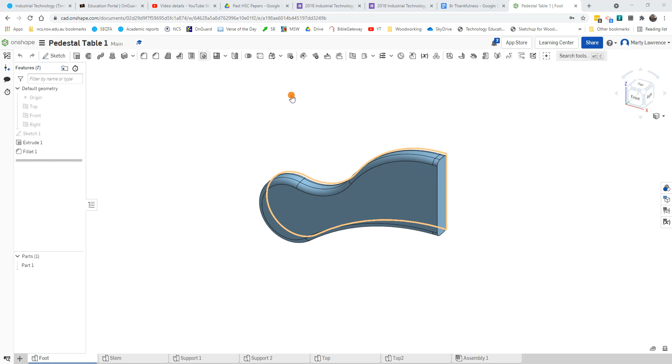This should be one of the final videos for the pedestal table. We've drawn all the parts that we need: a foot, a stem, two different support pieces, and we've designed the tabletop, whichever design you choose. The last thing we need to do is actually assemble it.

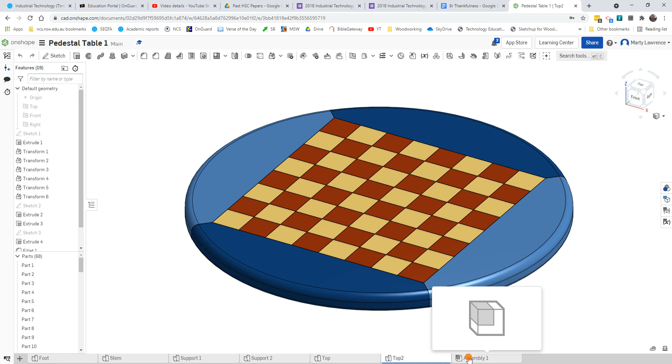So the other tabs down the bottom, you're going to go to the assembly tab. It's possible that you may have deleted that by mistake, so if it's not there, you just go insert new element and create assembly, and that'll be there. It'll bring you to this page, which is slightly different to the last one. There's different tools, it's kind of set up slightly different.

Up in this area where the sketch button normally is, there's an insert button. So I'll get you to click that, and you should see all the parts of your project here.

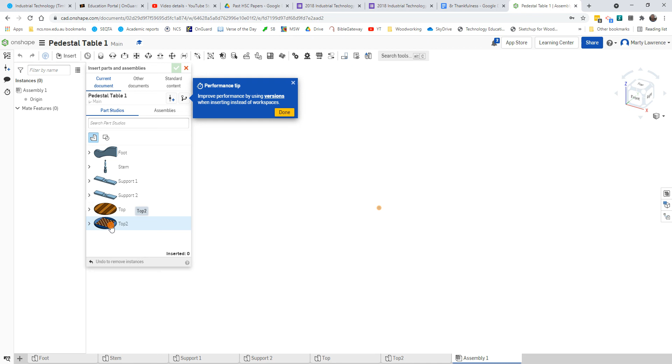Start with the top, and we'll just place that there. So you click in the dialog here, and then you move over to the white area and place it somewhere by clicking. Just to repeat, you've got to click once in this table that comes up, then move over to your white workspace area and click again to place. For now, that's all we are inserting.

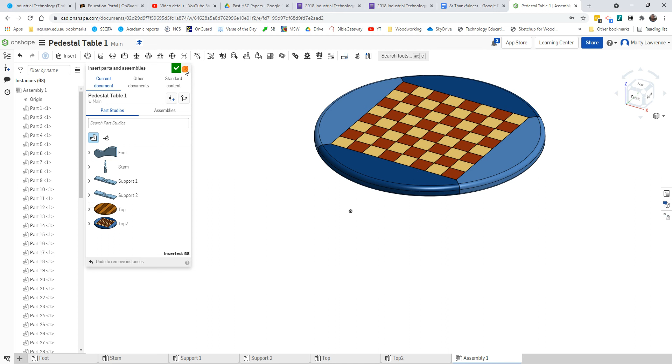Don't go and insert all the other stuff yet. Oh, I think I should have ticked - so don't do what I just did. So click insert, we'll only choose the top. Click in the list and then click once in the workspace.

We're just going to zoom that out. This time, tick, and all the parts we just inserted are there. So this thing has got heaps of parts.

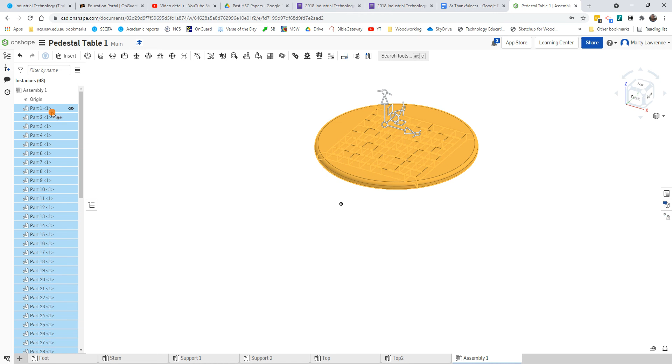Before we do anything, we actually will just want to select all those parts. The easiest way will be to drag a box around everything. I mean, you could go through the list and click each one to select. Now that they're all selected, right click, and we want to do this thing called fix.

And it'll put that icon next to all these pieces. So that's important that all the parts have that icon, because as we start inserting other parts, we don't want these parts to move around. We can turn that origin off too, which is that dot in the middle there, just with the eyeball.

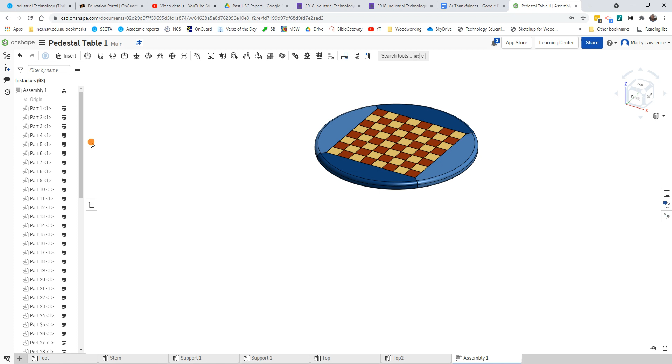All right, we're going to go back to the insert menu and start inserting all the other parts. So only the tabletop, we're going to fix all those parts in place. Now we can insert all the other parts, and you do that by clicking once, then click to the white space. So there's 4 feet.

So we click once on each one, go to the white space and place it. Click once in the menu, click to place it. Try not to pile them all on top of each other - it'll just make it hard for yourself later. So put them in an area where it will be easy to get to.

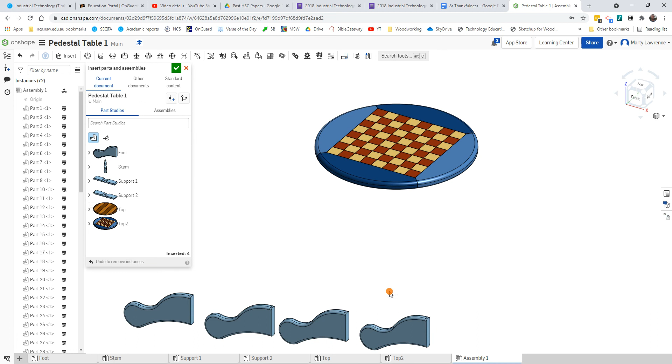There's one stem, so we'll just click once and place it on the workspace. There's one support 1, and there is a support 2. And tick once you've finished inserting.

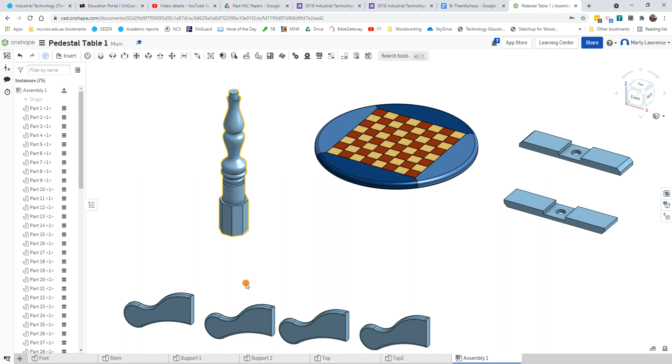Make sure you've got all your parts there. You've got the top, which we fixed all the parts, we've got the stem, we've got 4 feet, and the 2 different supports. Remember, the only difference between these supports is which side the chamfer's on. Other than that, they look identical.

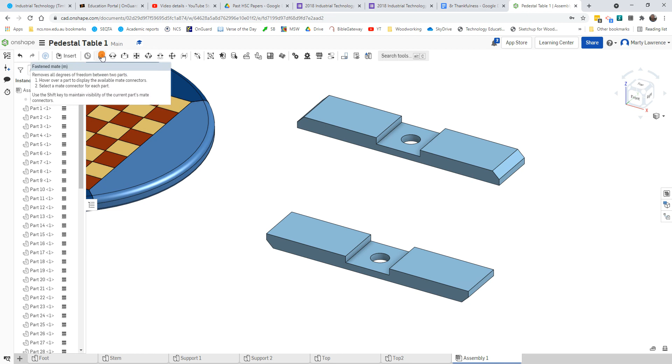So I'm just going to zoom in on these 2 supports - that's where we're going to start our work. We're looking in this top menu for a thing called a fastened mate. If you click that, we need to fasten this surface to that surface with the holes centered, so we can actually use the holes.

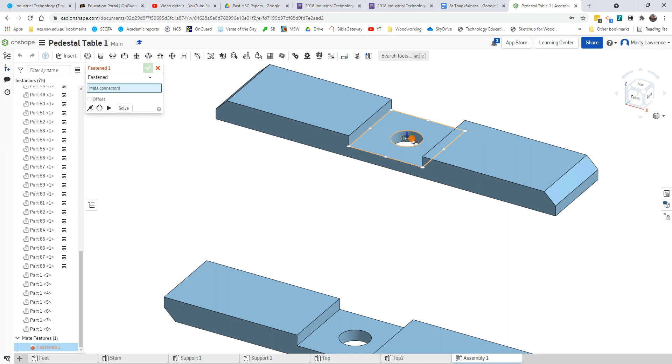Notice how I get that icon as I zoom in here, and it snaps to different places. It snaps to corners, but it also can snap to the midpoint of that circle. So if you need to, zoom in, but we need that little icon to be snapped to the midpoint in the circle. Once it's there, click once, and it should highlight that face yellow. Then let's move over to this face and do an identical thing. We're going to make sure that icon is on this face, but centered on that circle.

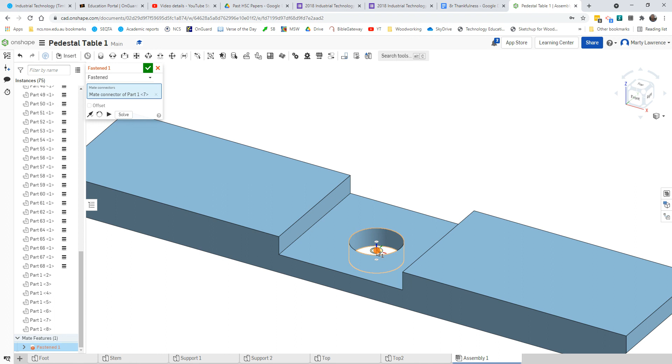Now, it could be easier to accidentally put it down - I don't know whether you've noticed that that can happen, it can go lower. Aim not to do that. Click, and it should - it has, but it's a bit hard to see. It's actually put both the parts together, and you can see that by looking at the end here. So it's done the right thing, but it's just put it in the wrong orientation. So there's two buttons here that turn up.

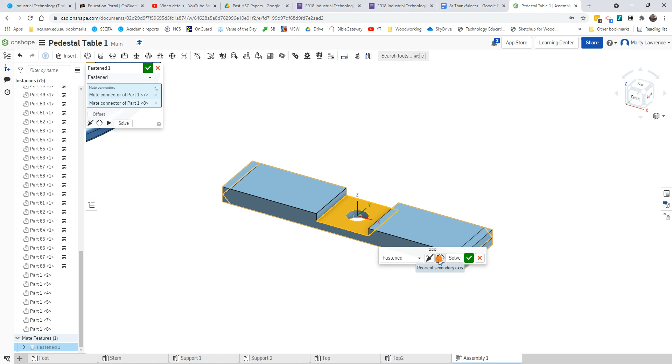Reorient secondary axis. So if you click that, see how it rotates? So that's the right thing, but it's upside down. So this other button here will flip it. You may have to adjust these buttons to get it sitting in the right place. Now to me that looks right. Once you're happy, you can tick.

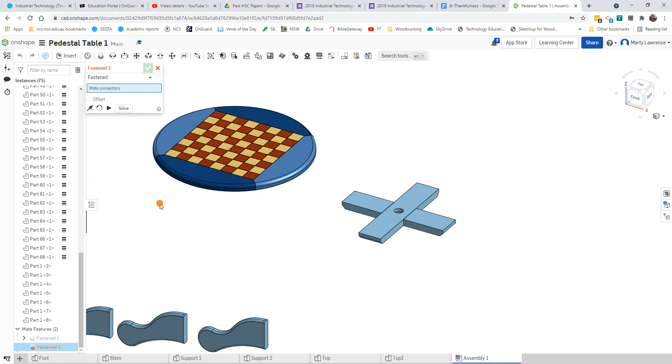Each time you do a fasten, they'll appear down here, but it'll make a new one open. So fasten 1 is the one I just did, the one you watched me do. Fasten 2 has opened, but nothing is connected. So we can simply keep selecting.

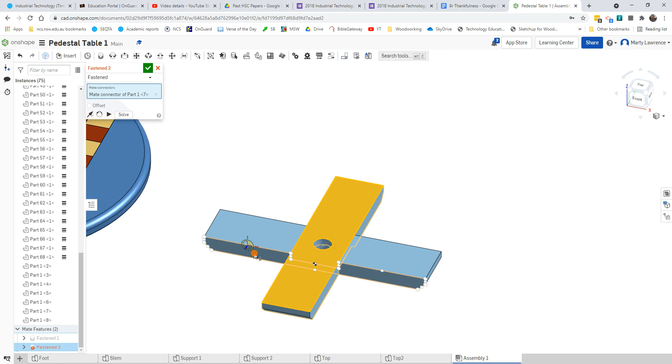So the next thing we're going to do is this face of this support piece sits flat underneath a tabletop. We're going to do a pretty similar thing: snap to the center point of that face right in the circle. Click once, it should highlight yellow. Now we have to click in the center point of this tabletop. So this could be tricky.

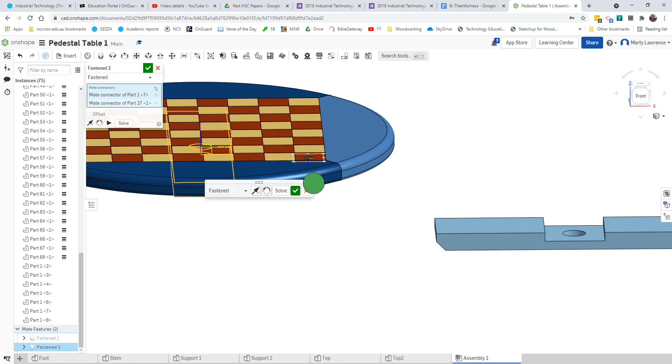For me, on this chessboard, it's going to be in a corner. But you do have to make sure that icon is sitting flat on the face. Click, and yes, it's put it in the right place. It didn't move the other piece yet - that's just so you can visualize whether it's in the right spot. Once you either hit solve or the tick, it'll bring the other piece into place.

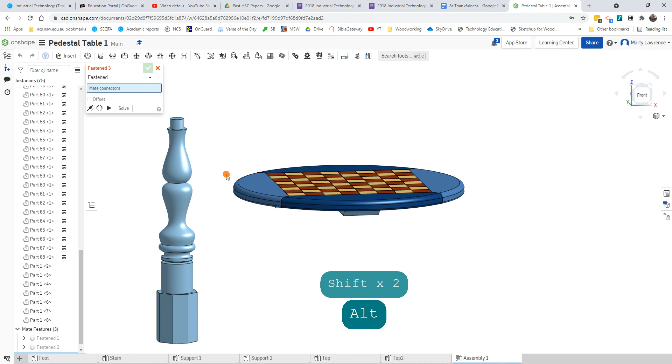And then tick. So that's sitting in the right place. The stem comes next, and look, it's opened up fastened 3. Similar thing. However, this one's a little bit trickier because we've got this rebate.

So we need to get this icon - hover your mouse on that face at the bottom of that rebate so we get the icon. It should snap to the middle there. Once it's there, click, make sure - so that should be okay.

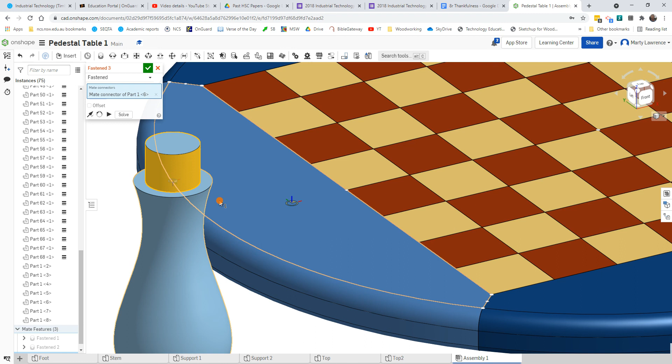And we'll have to orient our view, zoom in here, and flat on this face but centered in that circle, click. Just double check that it's in the right place. If it hasn't done the right thing, cancel and try again.

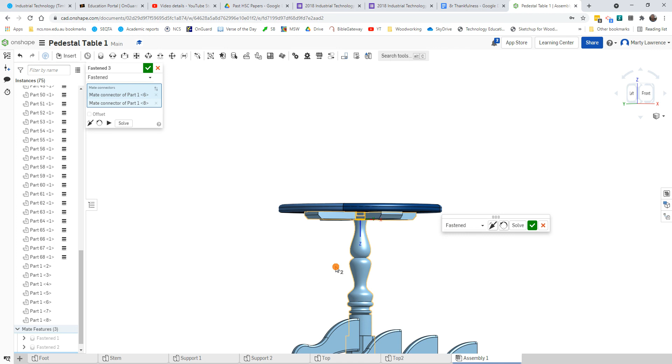And of course, once I tick this, it'll open up fastened 4. Now we've just got to place the feet. This one's a little bit trickier - we've just got to be a little bit more careful.

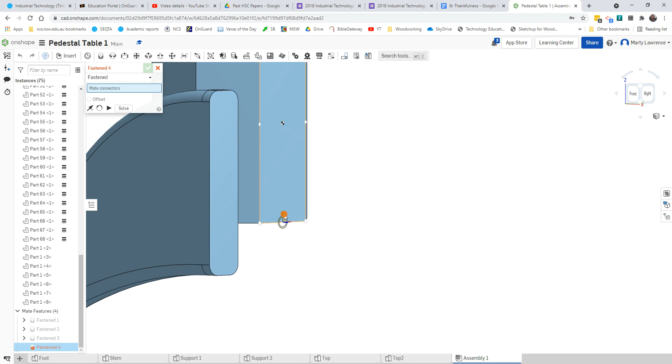So we want this face to sit on this face. And on this face, we want this edge - the middle of this edge - to be aligned with the middle of that edge. So hover over the face, make sure we get the icon sitting flat on the surface, then bring your cursor down to the midpoint of that bottom edge. Once it's there, click. It should paint that yellow and put a little grayed out icon where you clicked it.

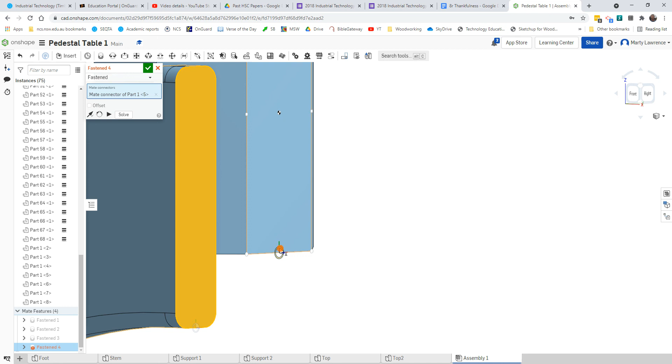Now we want to click in a corresponding face on this piece of the stem. So hover over the stem, but then move the cursor down to the midpoint of that edge. Make sure the cursor is flat and click.

It's done what it did before in that it just needs to be flipped. So if we flip that, it's in the right place, but it's upside down. So let's hit the rotate button. You just have to adjust these until it's sitting in the right place, and tick.

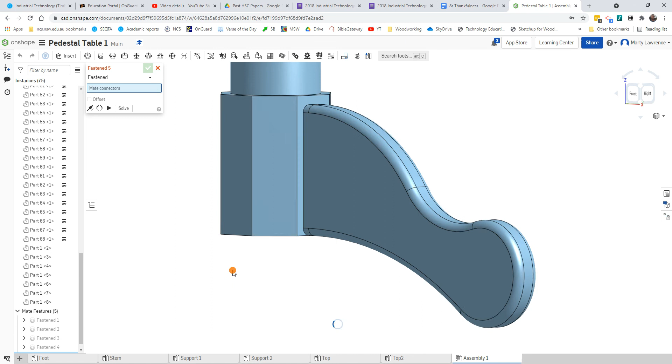Let's do that for the last 3 feet. So I'll zoom in on that surface, middle of bottom edge, click. It'll have to be this face, middle of bottom edge, and click. It's put it in a weird orientation this time, so we're going to have to do some revolving and some flipping. There we go. Tick.

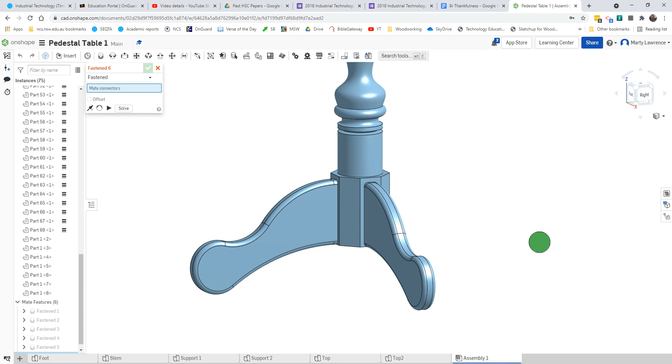Okay, middle of that face, bottom edge, click. We need to jump around 2 faces, so it'll be this one, middle of that bottom edge, click. Whoa. Looks like I need to do some flipping and some rotating. There we go. Tick. One to go - where is it?

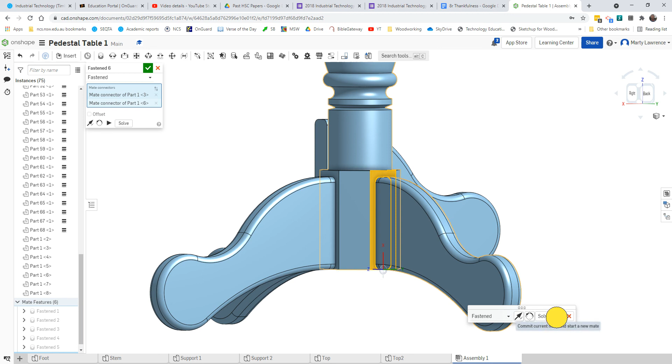It's way over there. This face, middle of the bottom edge, click. Now we're going to have to do a rotate. We'll get the middle of this bottom edge, click. Oh, look at that, it did that one correctly. And tick.

And we have just assembled our coffee table. We don't need to do any more fastening, so we can cancel this tool. Have a look in the list - all our parts are there. The tabletop is fixed in place. There's the other parts we added, and there's all the connectors that we put them together with, the fasteners.